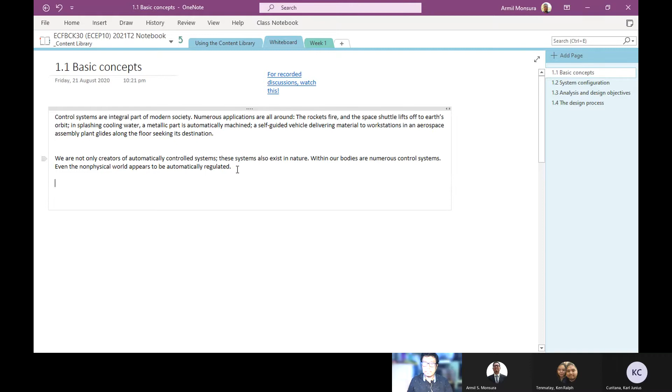Okay, let's go again. So for today, we will discuss the basic concepts of control systems engineering. Let's discuss these topics as much as we can. Although I can actually discuss this using recorded lectures, since I have an available recorded lecture for this one, I would still like to discuss them personally so that we could talk things out with regards to this topic.

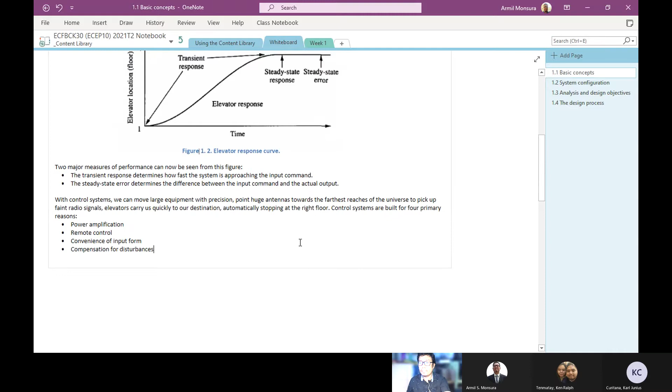Okay, so here are the things that we have to remember about control systems. First, control systems are an integral part of modern society. We can see many applications of control systems.

We see these applications in everyday life, and even in some of the technological advancements we are encountering every day. For example, rockets firing, a space shuttle lifting off to Earth's orbit, a metallic part being automatically machined with splashing cooling water, or a self-guided vehicle delivering material to workstations in an aerospace assembly plant, gliding along the floor seeking its destination.

Now, probably this might be something that you are not really seeing every day, because it's not every day that you can see rockets fire, or machine parts being assembled or done with accuracy. For example, the nuts and bolts used to stick materials together - you know they are manufactured by some methods, but you really don't see them every day. Or you don't see every day that autonomous vehicles are being used to move materials or move people around.

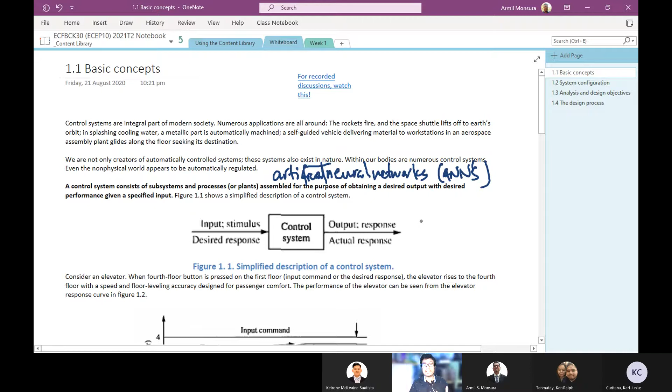You might have heard of neural networks, or artificial neural networks to be more precise. These artificial neural networks are computational algorithms that mimic how our neurons learn things in order to produce a certain output given a certain set of inputs.

This is based on our nervous system - our neurological nervous system, in which the manner by which it learns, the manner by which a human learns to do certain tasks, is adapted towards machines. So that's the advantage of developing our control systems now, from classical control systems engineering towards non-conventional control, which uses some of the naturally occurring control systems that are in place - one of which, for example, is neural networks.

Now let's define what a control system is. A control system consists of subsystems and processes or plants assembled for the purpose of obtaining a desired output with desired performance given a specified input. Let's break that down - let us define each of those things.

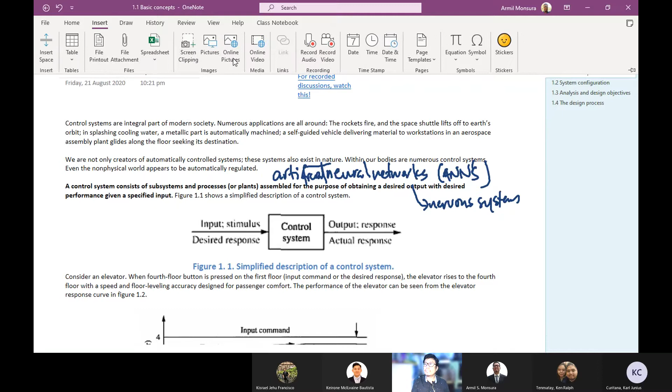First, subsystems and processes or plants - your control system may be an interconnection of different components. You may have component 1, component 2, component 3, interconnected in some way, one way or another, in order for you to have a complete system. So we might represent your control system using a block diagram, or using a single block like this one, but this may actually contain one or more components inside, connected in one way or another. So a control system may not actually consist of just a single system - it may actually consist of different components that are connected.

Now, the main character in that system is what we will call the process or the plant, depending on whether that component is actually a process - something that is measured within the system, like for example level, pressure, volume, or flow rate. Those are processes that can be measured, or those are the things that your system is trying to control. Processes or plants may actually be tangible components, like a motor, or a stabilizing system for example, for airplanes or ships. These are the main components that your system operates on. So that's the first part of our definition - they consist of subsystems and processes or plants, assembled.

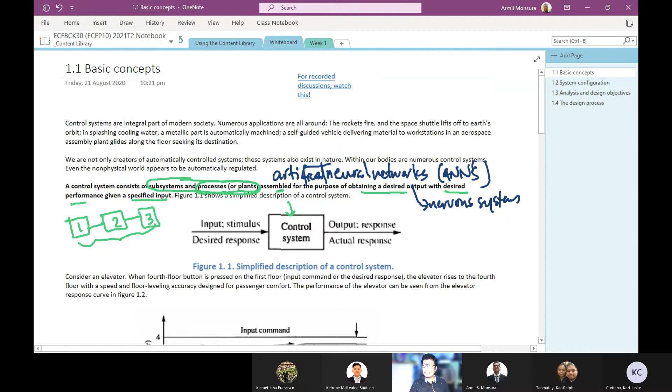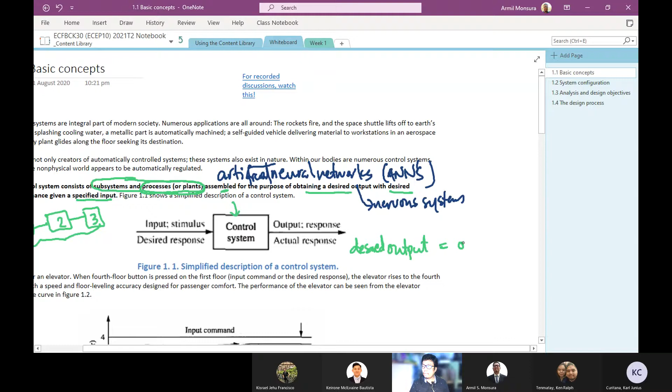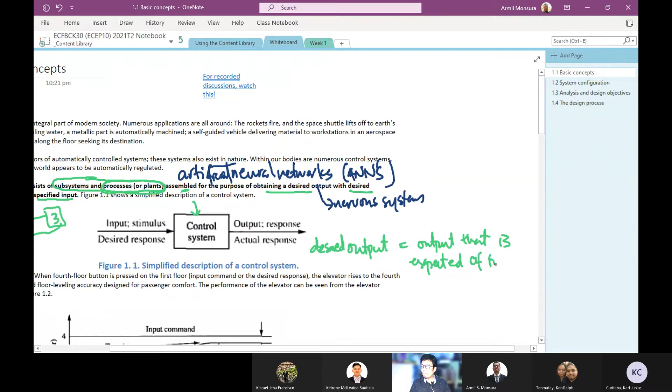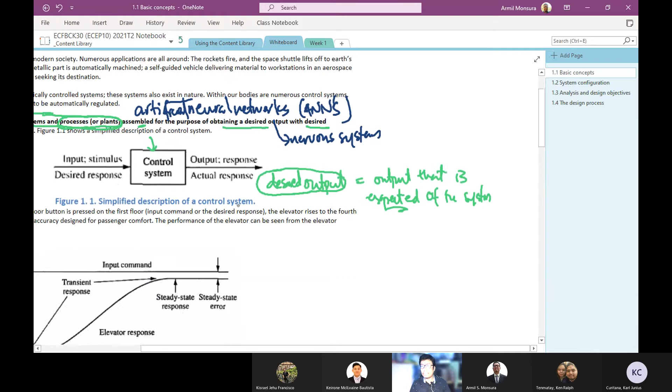Now what is the purpose? The purpose is to obtain a desired output with a desired performance given a specified input. When you say desired output, it means it is the output that is expected of the system. Which means, since it's expected, for you to be able to set expectations, your desired output is something that you would have to tell the system to achieve - you want the system to achieve this desired output. So basically, this desired output is your input to the control system. This is what you tell the system to do - this is what you want to happen. That's 'desired' - when you say desired, that means you want it to happen.

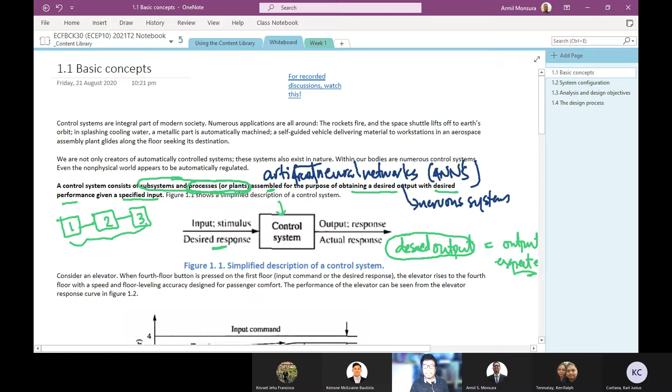Although by definition, response is actually an output. But when you say desired response, or basically desired output, it's actually an input or a command. Command is a more appropriate term here, not really input, because input could just be a signal. When you say command, you have a certain target that you need to achieve, and that target is the command.

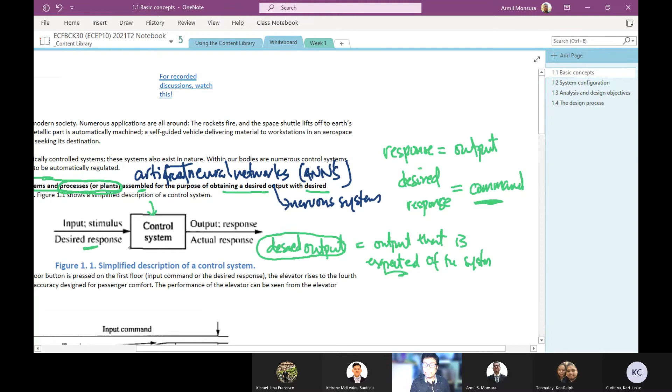So basically, a control system is something you have to send commands to in order for it to behave in a certain manner. Once you have sent your commands, or your desired response, to your control system, the control system should respond. The thing is, it's possible that this actual response and this desired response, the response the system gives versus what you want to happen, may not necessarily be the same.

For example, let's say you're driving a motor, and you turn the handlebar slightly to the left. That's the command, turning it so the motor turns left. That's the desired response you would like, because you want your motor to turn left. But it doesn't necessarily follow that when you turn left, it immediately goes left. It would follow a certain path, because the motor may have some dynamics that would not allow it to actually turn left right away.

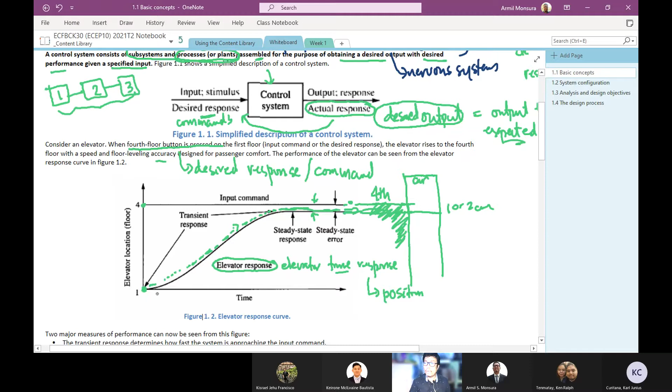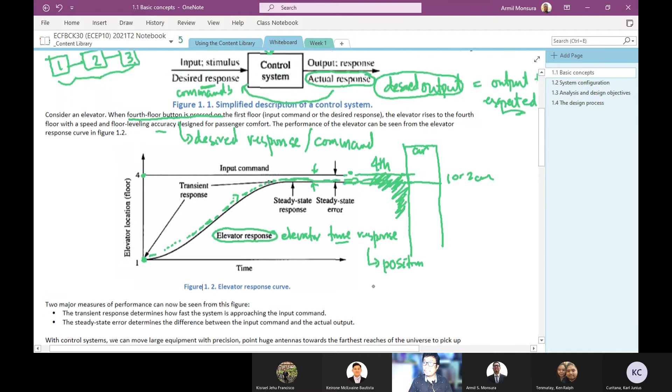Now this time response, or the change in position over time of this elevator, has two parts. It has two parts basically, we can divide this into two parts. One is the transient response.

That part of the response wherein your elevator is attempting to reach from the first floor up to the fourth floor, that's the transient response. And the second part is this, the steady state response.

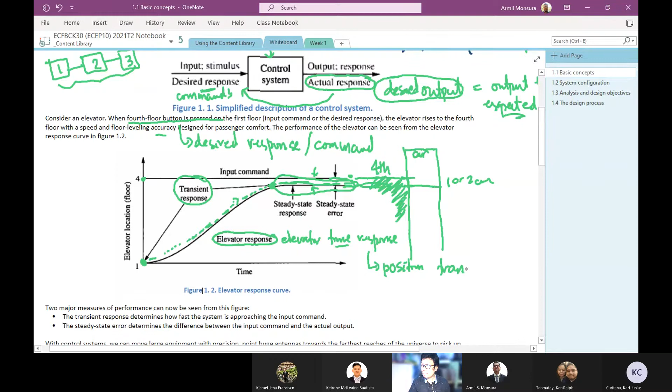Later on we'll define those two in terms of their mathematics, in terms of their math. But basically, in the simplest terms, your transient response is the immediate reaction of the system to a certain input command.

Which means once you commanded the system to change a certain quantity, like in this case position, so we tell our system to change its position, the system would take time in order for it to actually go to that desired position that you would like it to be. In the case of the elevator, again, as I said earlier, it doesn't go immediately from first floor to fourth floor. It doesn't teleport from first floor to fourth floor.

What it would do is eventually try to achieve that position of the fourth floor. So that time, or that output, or that part of the response where your elevator tries to achieve that position from first floor to fourth floor, is the transient response. So that's the immediate reaction.

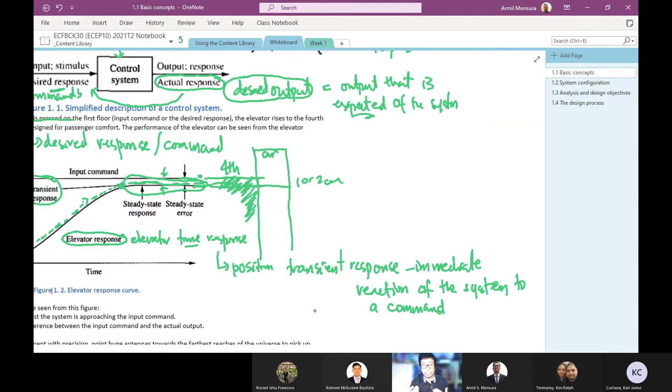Now, when your response settles to be at or near the input command — meaning when it's already there, or close to where we want the system commanded to achieve — if it settles to be at or near the input command, because you don't really have to necessarily...

have your system have the exact value of the command that you have inputted. For example, like I said earlier, your elevator might not land exactly on the fourth floor. It might have a slight difference, and that's fine.

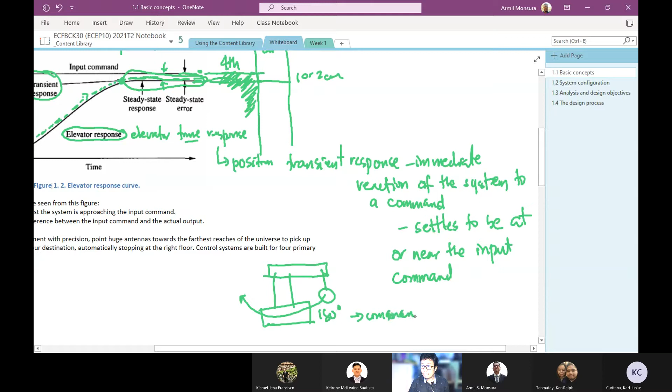But in terms of, say, a crane that carries a certain load from here to here — let's say we want it to rotate 180 degrees, that's the input command. But what it can actually achieve is 179 degrees, that's the actual angle achieved.

Now, the correct term to use here is settle. Many students define the steady state response as where the response is stable, but that's a common misuse. We don't use stability in this case. Mali yung usage ng stability dito. It's more of settling, more of it settles on a certain value rather than stabilizing on a certain value, because we will use stable or stability in another context, and that context doesn't apply for steady state response.

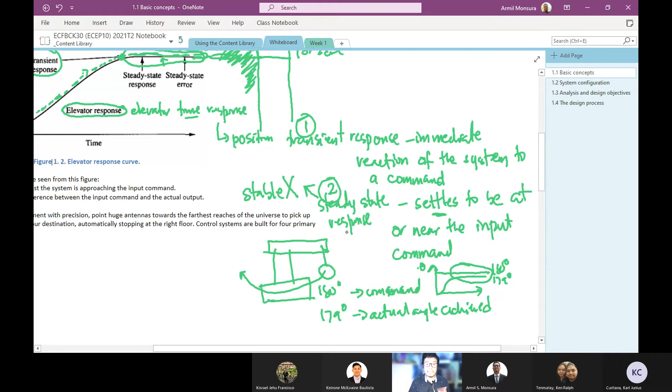Okay, sige. Now, in this case, okay. So, sige, thank you.

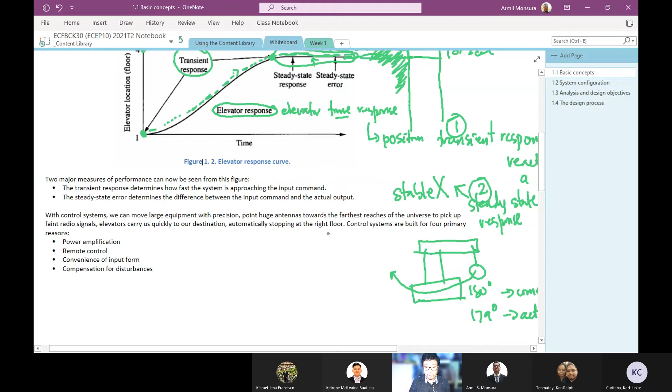In this case, we now measure, kasi what we do, what we want to do as control systems engineer is that we control these things. We want to control this performance, or we want to have a certain level of performance for these things. Ano yung mga i-measure natin, or ano yung mga performance indicators ng system natin?

We have two. Number one, the transient response itself. We want to measure how fast your system undergoes the transient response. Gaano kabilis ito? Because we might want this to be fast, or we want it to be slow. Or sometimes our transient response would actually go some oscillation or some overshoot. We call this overshoot, once before it actually settles to a certain value. We might want to control how much overshoot it would contain.

So we want to measure these things, kung gaano siya kabilis, whether it's fast, it's slow, it has overshoot, or it oscillates at a certain time, and how fast it actually settles, in order for us to say that our system is okay or not. So that's one thing, we measure the transient response. The other one is the steady state error.

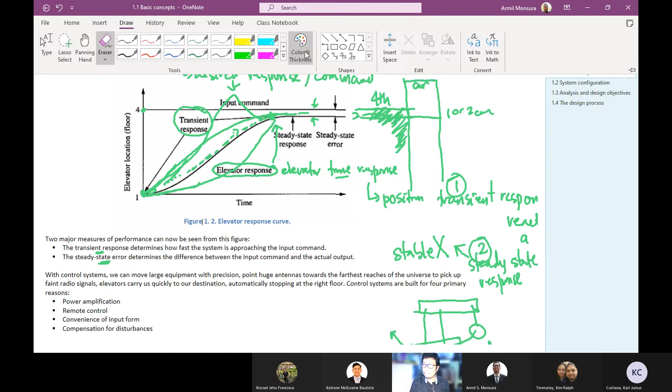The steady state error is the difference, basically, between the input or the command and the actual. This is your command, and this is the actual. The difference between the command and the actual is the steady state error.

So these are the major measures of the performance of your control systems: how fast your system tries to achieve the steady state response, and the steady state error, which is the difference between the command and the actual settling value, or the actual output of your system. Is this clear?

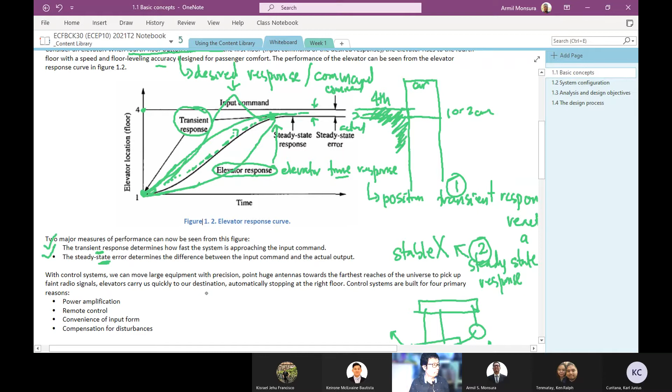So, sige. So why do we now build control systems? What are the reasons why we build control systems? We have primarily four reasons why we build control systems. So number one, power amplification.

Power amplification pertains to the fact that we can actually lift heavy objects or control heavy objects. Like in the case of a crane, where a man riding on top, nandito siya sa taas, controls this crane, where now your crane carries a very heavy load, which is to be transferred from one point of the construction site to another. So by using this crane, this man can lift this very heavy object. So that's power amplification.

That's the first reason. Second reason is remote control. Remote control means you are on a certain location and you are trying to control another system in another location. Say for example, satellites. Yung satellites kasi natin usually has a certain position above Earth, meron siya certain position, like for example, distance from the Earth, its footprint, gaano kalaki yung sakop niyang footprint dito sa Earth.

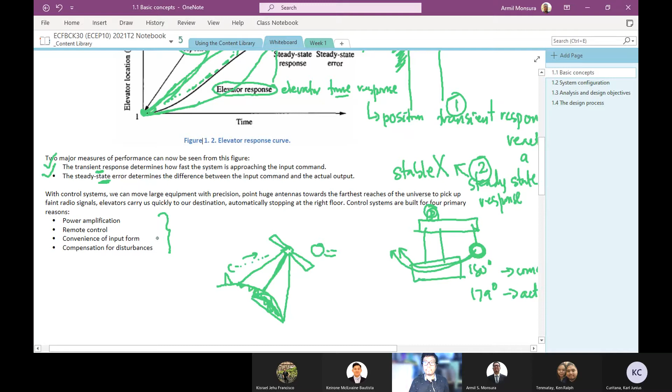Okay, number three, convenience of input form. When you say convenience of input form, it means the output you are trying to control is not really something that is tangible. One example of this is the aircon. The aircon basically blows out air, and the purpose of the aircon is to condition the air, usually in the form of temperature. What the air conditioner conditions is the temperature, but you are not able to control the temperature directly.

So how do you control it using the aircon? You use the thermostat. In this case, your input is basically an angular position, because you twist the thermostat. So your adjustment is an angular position, and by adjusting the angular position, you can adjust the temperature. So that basically is a very convenient way of adjusting the temperature itself.

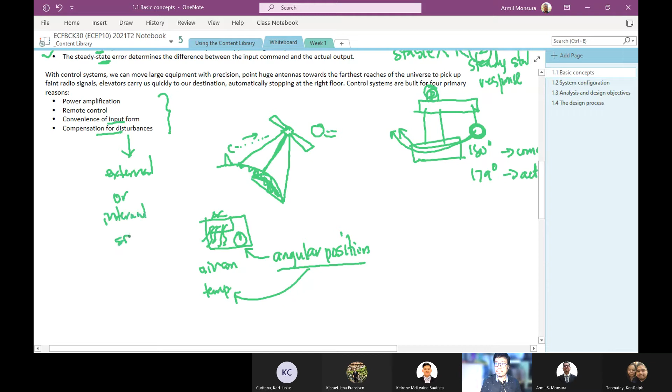And finally, we use control systems as compensation for disturbances. These disturbances are external or internal signals that affect the output. Although in this context, compensation for disturbances talks more of an external disturbance.

An example of which is, for instance, the presence of a meteor or asteroid that can actually hit this satellite — that is a disturbance. But what the satellite can do is that after it detects that it has a change in its position because of this disturbance, it can automatically adjust itself.

Earlier we talked about remote control, where there's an external input from someone at the Earth station to correct its position. But it's also possible that the satellite itself can detect and correct its position when it encounters a change in position because of this disturbance. That falls under number four — if it can automatically correct its position in the presence of this disturbance. Another example for compensation for disturbance is this.

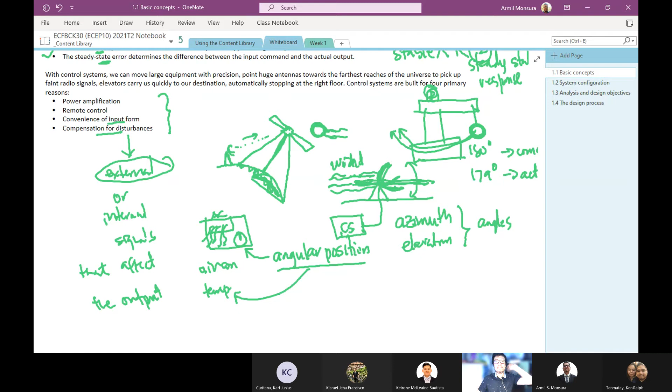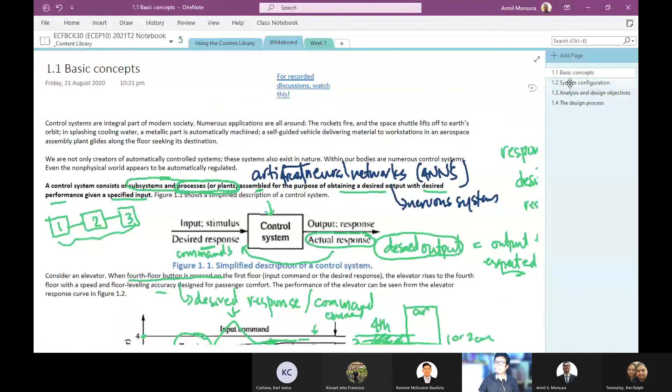This lesson is about system configuration. There are control systems, and we'll be talking about classical control theory. So the configuration that we will be dealing with in terms of control systems are those traditionally used in the context of control systems engineering. But I'd like to inform you that as technology grows, control systems engineering also evolves into a more advanced study.

Aside from the configurations we will be discussing here, there are many more available configurations, but what's here is what's used in the discussion of classical control systems engineering. So there are two types of configuration that we will have to differentiate, but later on we will mainly be using only one, since we will be dealing with automatic control systems.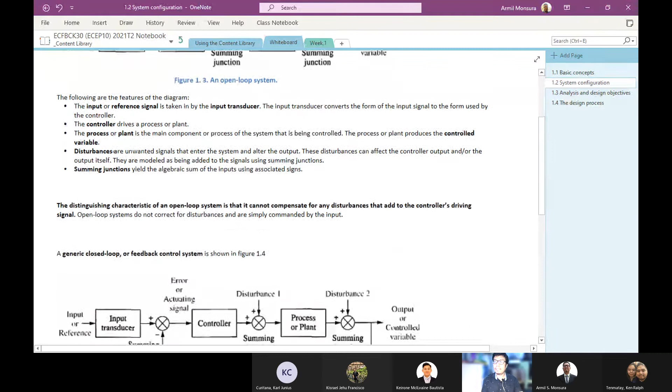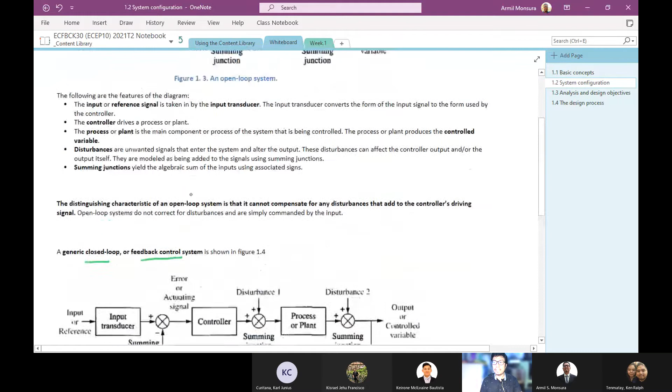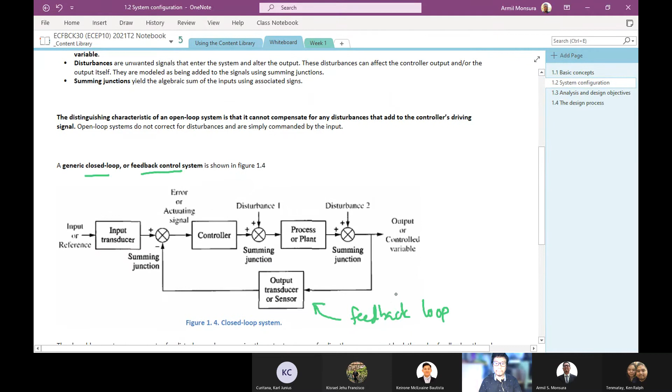So we have the generic open loop system, and the closed loop or feedback control system. If you take a look at those two, you would see that the main difference is the presence of the feedback loop. Notice that what really differentiates them is the presence of this feedback loop. So let's discuss what we see in the open loop and in the closed loop system.

In the open loop system, we will have the input transducer, the controller, the process or plant. Then we have disturbances 1 and 2. We have the input or command, and then we have the output or controlled variable. So these are the definitions or features of the diagram.

The input or reference signal is taken by the input transducer. The input transducer converts the form of the input signal to the form used by the controller. Usually the controller is an electronic circuit, although it is not always the case that your controller is an electronic circuit.

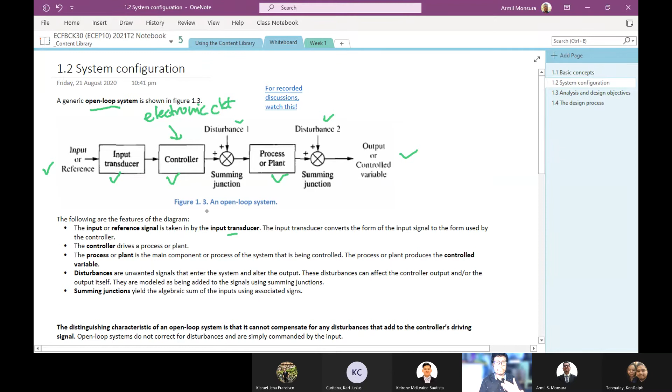But in our case, since we would like to design or control a certain system, we would have this controller as an electronic circuit. We will use electronic circuits as our controller. And if this is an electronic circuit, the job of the input transducer is to convert the signal into a form that is used by your controller. If your controller is an electronic circuit, for example, then it uses voltages or currents in order for it to work, since it's an electronic circuit.

So if it's an electronic circuit, most likely your input here is voltage. So therefore, if this is not voltage—say, for example, this is position or angular displacement—the main work of your input transducer is to convert this position or angular displacement into voltage, since voltage is what the controller will use. So what would happen is that this input transducer would produce a voltage that is proportional to the position set here. That is the work of the input transducer.

That is, to convert the form of the input signal to the form used by the controller. So in this case, since your controller is an electronic circuit, its input should be voltage. The input transducer should convert any input—whether it's position, angular displacement, flow rate, or whatever—into voltage. Is that understood?

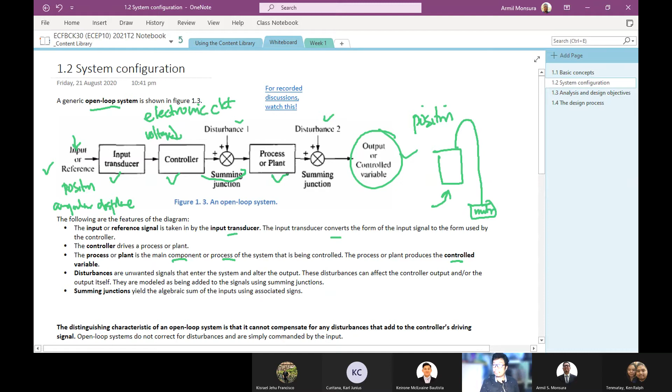In the case of an aircon, the compressor blows air to cool or warm a room. In the Philippines, we don't use aircon to produce heat—at least in our case, since it's already hot, aircon is just for cooling. But in other countries, since it's cold there, they use the air conditioner to both heat and cool the environment.

So in this case, the process or plant would produce the main output. That is why, if you are to put a certain system into a block diagram like this one, you'll be given a situation where you're asked to identify, for that system, which is the input transducer, which is the controller, and which is the process or plant.

The first step is to know what your input signal is and what your output signal is. Once you've identified the input and output signal, whatever component produces the output signal is your process or plant.

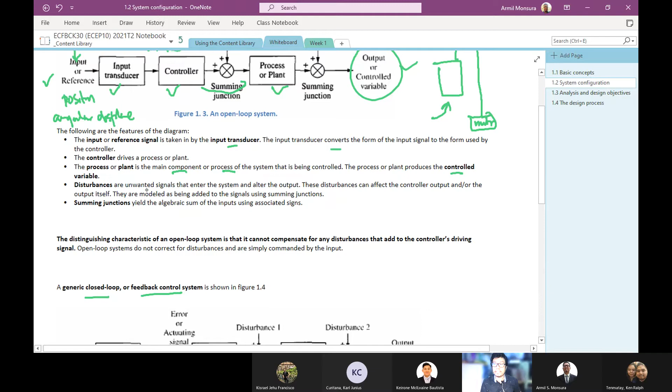Now, disturbances, as I said earlier, are unwanted signals that enter the system and alter the output. Because this is a block diagram, we need a way to model how your disturbance can actually enter the system. For that, we use the summing junction, which adds the signal coming out of the controller and the disturbance.

But remember, for your signals to be added, they should be of the same quantity. Otherwise, if this is an orange and this is an apple, you cannot add oranges and apples directly. In this case, this is what's in our model.

We need to remember that the output of your controller is in terms of voltage. Therefore, for it to be added, your disturbance here should also be in voltage. So we should always remember: if the output of our controller is voltage, this disturbance must also be voltage, in order to produce the voltage to control the process or plant.

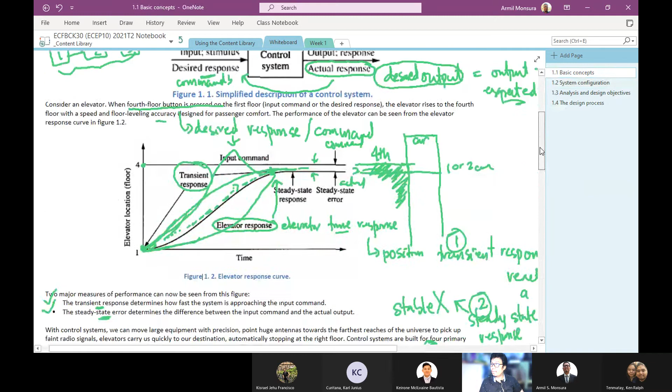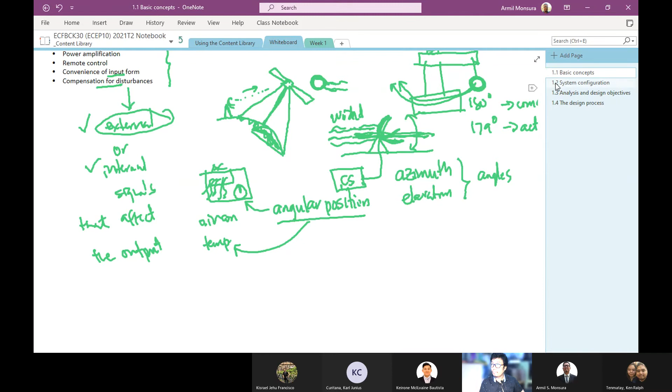We mentioned earlier that your disturbance may be external or internal signals that affect your output. In this case, this disturbance is an internal disturbance, because it adds up to the signal produced by the controller. And in order for it to add up, the output of the controller and this disturbance should be of the same quantity. So this disturbance should be found inside the circuit, or internal to the circuit, in order for it to add up to the voltage produced by your controller.

While this disturbance too, in order to add the two signals, should be the same quantity as what is produced by the process or plant. And again, the output of the plant is actually the output or the control variable. If the output is a motor, it would produce angular displacement as an output, which in that case, this disturbance should also cause changes in angular displacement.

Because they need to add up. The main idea behind the summing junction is that it should add signals of the same quantity. It needs to add signals of the same quantity. So if angular displacement is what disturbance 2 produces, this disturbance 2 should be an external disturbance. For example, wind. Wind can alter angular displacement.

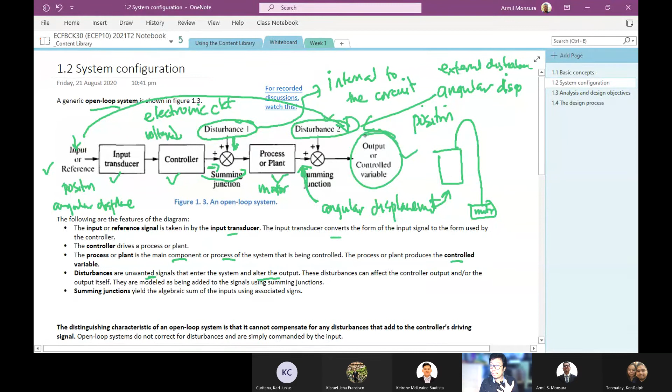So like our example earlier about the antenna position control system, or the azimuth of your antenna, if the wind blows, it would change, it would cause the azimuth of your antenna to change. So the angular displacement produced by the motor, by your process or plant, can add up to the angular displacement produced by the wind, this disturbance. Therefore, there really is a difference in the angular displacement of your system.

So in this case, for example, you have inputted that your azimuth changed by 45 degrees. So that's angular displacement. So that 45 degrees would be changed to a proportional voltage towards your controller to make your motor rotate to produce 45 degrees angular displacement. Let's say it achieved that, 45 degrees, even in the presence of the internal disturbance. Let's say this one is negligible for now.

So what would happen is that, given this 45 degrees, wind blows. So what happened is it added 2 degrees of angular displacement to our antenna. So all in all, our output became 47 degrees. The output angular displacement of our antenna became 47 degrees. So therefore, there is now a difference between the output and the input, which is something we sometimes don't like, because this is why we design a control system, to get rid of that disturbance. Did you understand the logic behind this?

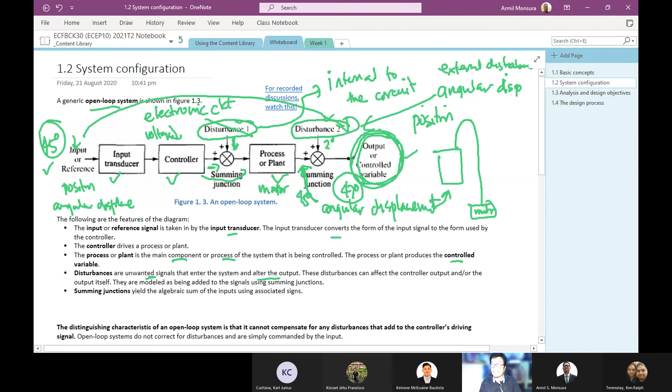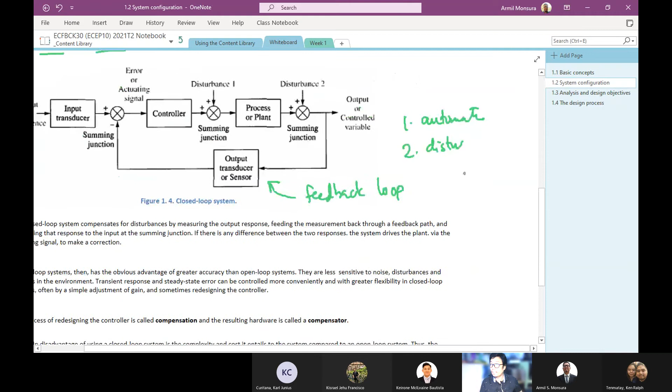Now, we can actually prevent this from happening by devising a feedback loop. So when we design a feedback loop here, we can actually say that we can control, we can automate things when we have a feedback loop. And number 2, we can actually compensate for disturbances, or we can actually ignore them, depending on how the controller is designed, because of this feedback loop. But that depends on how your controller is designed.

So what does the feedback loop do? It actually measures the output response, it measures this one. And then, seeing that you have here a summing junction, that is the difference of this signal and this signal, which is basically from the output, it actually looks into the difference between the input and the output. It looks at the difference between your input and your output.

Thereby producing what we call the error or actuating signal. That error or actuating signal is what drives the controller. So in this case, what would happen is...

The controller runs depending on how much difference there is between the input and the output. If this difference is large, your controller is working very hard. So if the difference is large, the controller also produces a very large signal in order to drive the plant faster, so that it can achieve matching between the input and output.

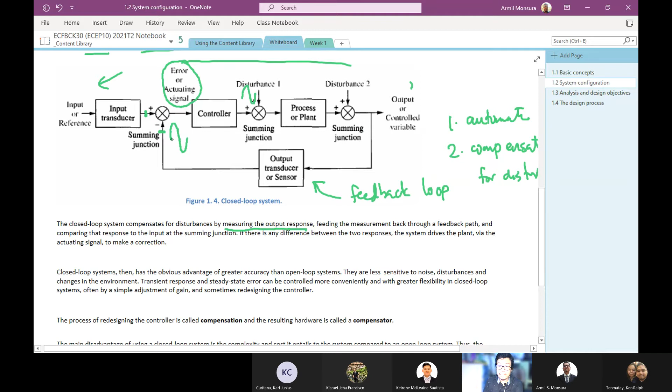Now, if the output transducer measures that this signal eventually becomes very small, because the input and output readings become the same, the output signal of your controller also becomes very small, thereby driving the process or plant in a manner that is not as powerful as before. So the changes in output become smaller, until such time that the difference is actually zero, and the controller now stops sending controlling signals to your process or plant, and the output now stays the same.

But that only happens when your input and output are of the same magnitude. Say, for example, the input is 45 degrees. At the start, the azimuth is 0 degrees. Your output transducer measures that this is a very large difference, between 45 and 0 degrees. It would send a very large signal as your error or as your activating signal. In this case, this is called an actuating signal.

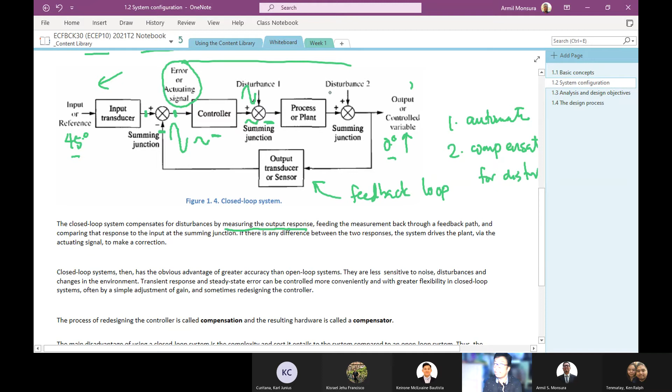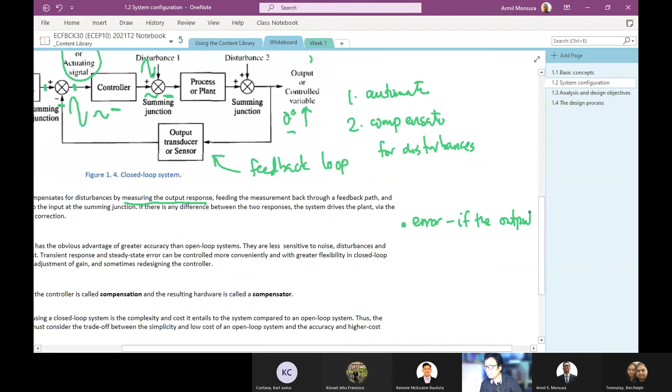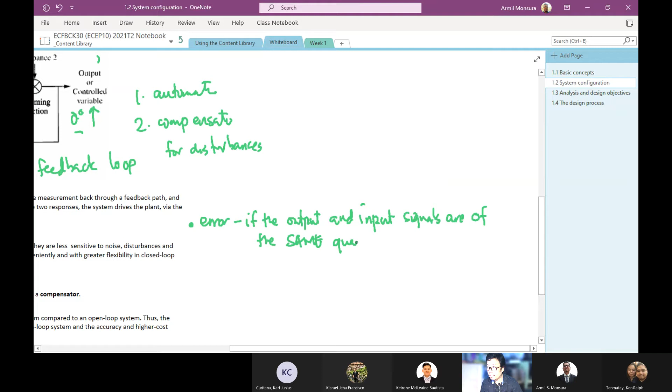If these two are of different quantities, they are called actuating signal. But in this case, since they are the same - degrees, angular displacement here and angular displacement there - we can simply call this signal as error. We call that error if the output and input signals are of the same quantity. If they are the same quantity, if angular displacement is the input and angular displacement is the output, it's called an error signal.

It is called an actuating signal if the output and input signals are of different quantities.

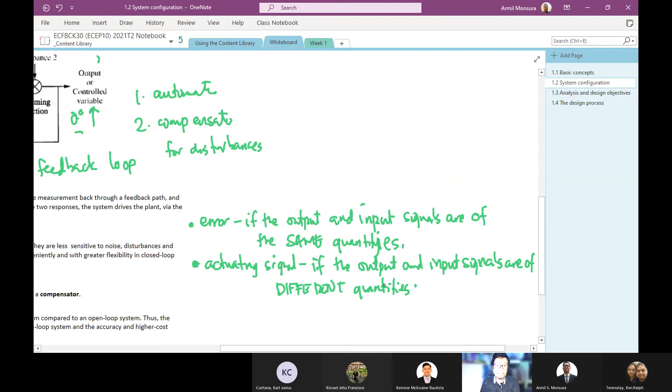In the presence of these sensors, the output transducer and input transducer, it is likely, when you have input transducer and output transducer, that the input and output signals are different. If your system employs input and output transducers, it is likely that the input and output signals are different, and therefore this is an actuating signal. But if you don't have these, or even if you have them, it is likely that the signal is an error signal because they might just be the same.

But in this case, in the very case we are considering, whether you have input or output transducer, we have identified that our input is an angular displacement and our output is also an angular displacement. So therefore they are the same quantity, and therefore this is an error signal. We will consider this to be an error signal.

So as I was saying, since there's a large difference between the 45 degrees input and the 0 degrees output, the error signal would be very large. Therefore, the controller will produce a very large voltage to drive this motor - this process is now a motor - causing it to turn faster so it can adjust more quickly.

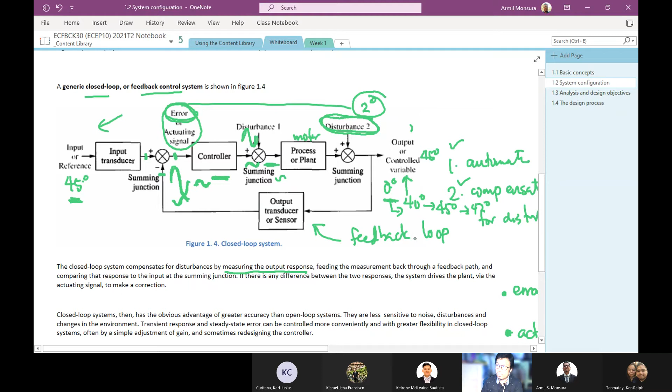So what would happen is that pipilitin ngayon ng motor ninyo na umikot in spite of the presence of this disturbance signal that causes your output to deviate by 2 degrees, para bumalik ulit siya sa 45 degrees. And that would always happen kahit na merong presence ng signal ninyo. So therefore, your feedback loop would cause your system to compensate for disturbances. Is that clear?

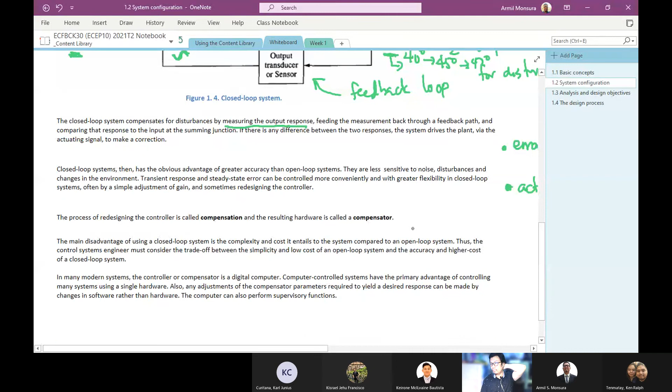So closed loop systems have the obvious advantage of greater accuracy than open loop systems. The closed loop system can achieve input commands in a more accurate manner than open loop system, kasi sa open loop system, walang self-correction. Your open loop system does not correct itself.

What happens is that basta ang mangyayari sa open loop system niyo is that kapag nag-produce na siya ng output, your system doesn't have any idea on what the output is because it doesn't measure it.

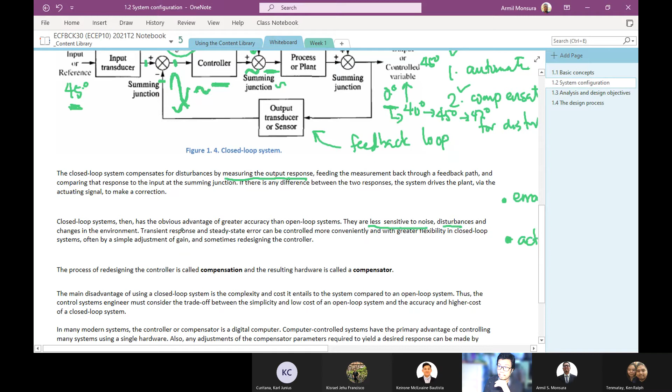So closed loop systems are less sensitive to noise, disturbances, and changes in the environment, even changes inside the circuit, because over time, in 10 to 15 to 20 years, yung circuit na ginagamit natin to actually control ito, yung controller natin dito, in 10, 15, 20 years, that circuit that we use to design the controller will change. Whether we like it or not, those components or the components of those circuits will change in value. So therefore, it will also change by the manner by which it actually controls the entire thing.

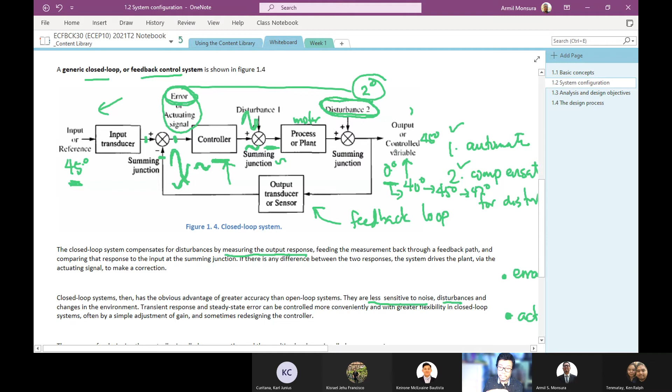Pero the advantage of your feedback loop or your closed loop system is that even if this controller also changes, but not with very drastic values, even if there are changes in the controller over time, it could actually still correct for those changes. So your system is basically less sensitive to changes inside and outside.

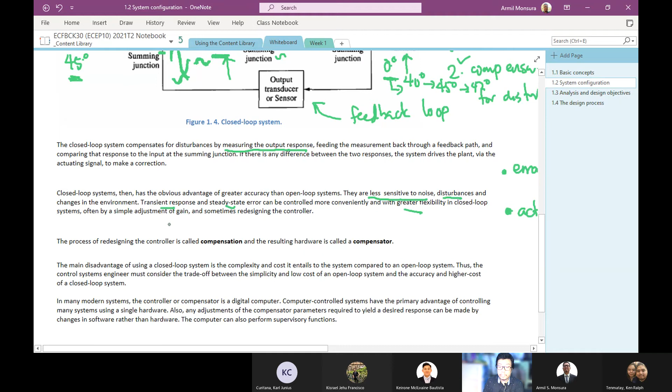So you can control the transient response and steady state error with greater flexibility in closed loop system. Now in order for us to actually change those transient response and steady state error, what we can control here - ang mababago lang naman kasi natin dito sa mga 'to is itong controller.

So your system may actually be performing with a certain transient response and steady state error. It may be performing with that level of performance. But you might want to make it faster, o kaya make it slower, depending sa requirements. And in that case, the only thing that we can actually change, in the best cheapest way, is itong controller.

Kasi actually, pwede mo palitan yung process or plant, kaya lang, yan kasi yung main component mo eh. So changing this would actually cost money. Whereas ito, simple circuit change can actually achieve what you would like to achieve with the performance in terms of transient response or steady state error.

So pwedeng palitan mo yung plant mo, pero gagastos ka talaga. Kasi in the case of this one, magpapalit ka ng motor. Paano kung malaking motor 'yan? So labor, pagbili ng motor, oras pa para mapalitan mo siya. That would be whereas ito, magpalit ka lang ng op amp, okay, or magpalit ka lang ng mga resistors, ng mga capacitors, that would do the trick.

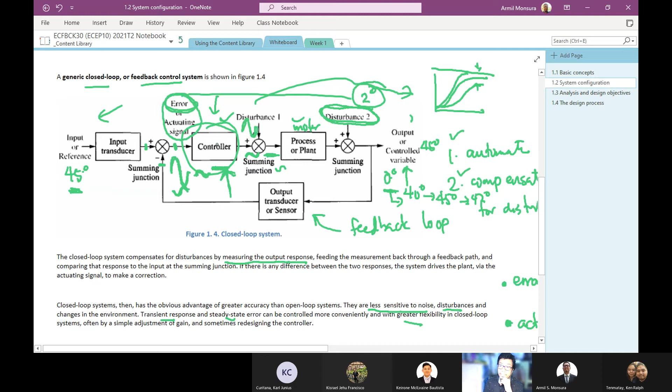So in most cases, what we would like to do is to actually redesign this controller, and that redesigning your controller or the process of redesigning the controller is what we call compensation, and the resulting hardware is called a compensator.

So ang objective natin dito is to learn the objective of control systems engineering, is to actually learn how to measure this first thing, how to predict these performances, yung transient response, tsaka yung steady state error. How do we predict them? How do we measure them? And then how do we actually design compensators in order for us to achieve a certain level of performance in terms of transient response and steady state error.

Okay, kasi yan yung ibibigay sa atin as requirements eh. So may ibibigay sa atin na requirements na dapat ganito lang ang transient response mo, dapat ganito lang ang error mo. And in that case, the easiest way of actually achieving those design objectives is

by actually changing the controller. Kasi hindi natin option yung magpapalit ng plant. That would basically lead us to have a more expensive redesign or designing of your system, lalo na kung nandiyan naman na yung system mo, yung plant mo, o yung process mo. Okay, naintindihan ba 'yan?

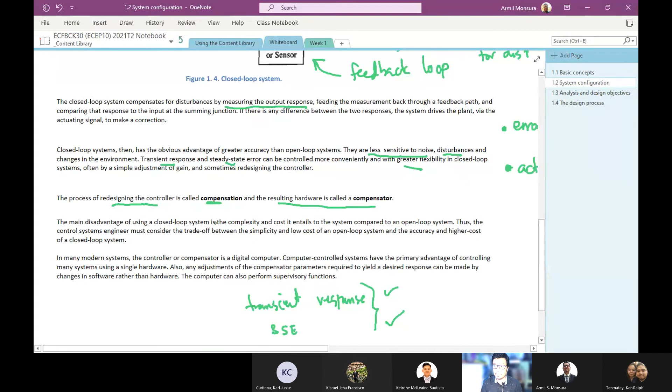Although it's stated that the main disadvantage of using a closed loop system is the complexity, which is totoo naman kasi maglalagay pa kayo ng extra component compared dun sa open loop system, we don't really consider this as a disadvantage. For one thing, this disadvantage that the book is talking about is outweighed by what the benefit of adding a feedback loop achieves. Mas malaki naman yung magiging pakinabang natin kung meron tayong feedback loop kaysa dun sa paglalagay natin ng, say, for example, a sensor.

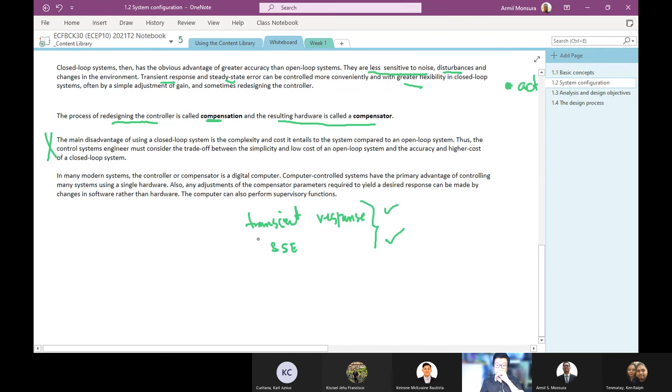This is a simple sensor. Although it would increase the complexity of your circuit, that increasing complexity is outweighed by whatever benefit we can actually obtain from having a system that is free or less sensitive to disturbances, less sensitive to changes in the environment, and can actually be flexible in terms of achieving the transient response and the steady state error that we need your system to achieve.

And that disadvantage can actually be erased when you actually use computers as controllers. Kung computer yung gagamitin niyo as a controller, mas maganda, kasi your computer is a very flexible device. It can actually do many things. You can program it to supervise and control many systems at once.

Depende sa bilis nung computer mo, at the same time you can also use it for other purposes. So yung complexity, although kailangan mo rin syempre ng converter ng data from the system papunta sa computer, so that actually increases the complexity. Pero again,

the main advantage of your system being controlled by a computer is something that is really, kumbaga, parang malaking tulong siya sa iyo, being someone that designs a certain control system, especially for malakihang deployment. Kung malaki yung deployment, ikaw ay isang industrial plant, you have many machines, or you are operating so many machines in your plant, and you would like to control the performance of each of those machines, then using a computer for that purpose will actually be more advantageous in your case, rather than looking at the cost of implementing a control system that uses the computer as the controller.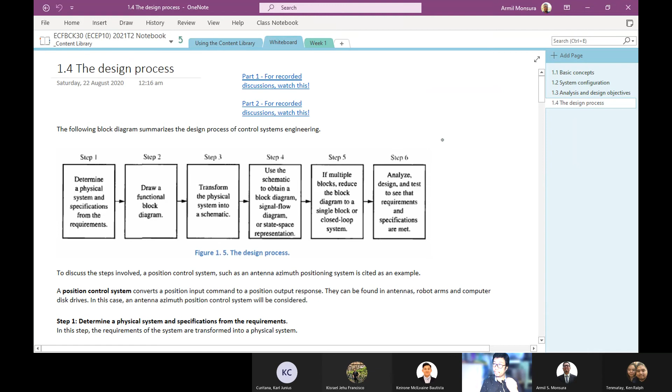Okay, ayan. Now, reminder lang sa paggawa ng homework ninyo. Sasagutan ninyo siya dito, halimbawa, name 3 applications for feedback control systems. So you would type in your answer here. Answer in complete sentences about applications of control systems engineer or feedback control systems. Diyan kayo magsasagot dun sa second row.

Meron kayong dalawang options para sumagot: you can type in your answers, or you can write your answers on a piece of paper, then scan and upload it here.

Kapag mag-i-scan and upload kayo, remember na sana mababasa ko siya. Kung magre-resort kayo sa magsulat at mag-scan, please check if your uploaded image is readable or not. Dahil pagka hindi ko nabasa, I won't waste any time on reading them. Automatically, imamali ko na lang siya pag hindi talaga siya mabasa, at hindi ko na kayo tatanungin pa tungkol doon. Ididiretso ko talaga siyang mali pagka ganun. So make sure na kapag mag-i-scan kayo, mag-handwrite, at mag-upload, siguraduhin na readable siya, na nababasa. Maliwanag ba yun?

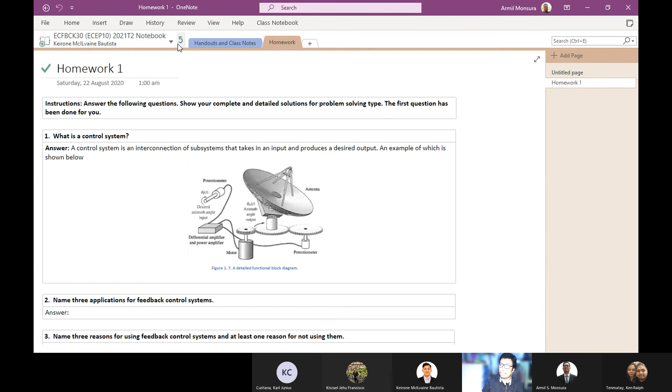Please check if you have homework 1, dahil konti lang naman kayo, I can actually check. Lahat naman kayo meron ng homework 1, so please do check if you have them.

Sir, pwedeng handwritten, pwedeng digital? Yes, kung ano yung mas madali sa inyo. O kaya pwedeng mix, kasi baka gusto niyong i-type yung iba, pero may gusto kayong i-drawing na hindi niyo kaya sa digital, mas madali sa inyo na i-drawing sa papel. Pwede rin naman yun, so pwedeng ang text typewritten at ang image hand drawn. It's okay na handwritten siya, pwede rin siyang digital.

Ang reminder ko lang, pagka handwritten siya o gusto niyo siyang i-handwrite, please make sure na pag in-scan niyo siya, mababasa ko siya. Yun lang naman yung reminder ko.

Any more questions? Wala naman na po, sir. Pwede po kumuha ng idea sa answer sa lecture o sa ibang source? Pwede kayong kumuha ng ideas sa answer sa lecture, pero I would like you to explain them on how you were able to understand them. Magbabasa rin naman kayo ng materials mula dito at sa ibang sources, pwede niyo silang pagsamahin, tapos explain them in your own terms or words. Ang ayaw ko lang is bibigyan niyo ako ng sagot na alam kong kinuha niyo lang directly sa libro — ibang usapan na yun kapag ganun. Okay lang kumuha ng idea sa libro, pero hindi okay na kopyahin niyo eksakto yung libro as your answers.